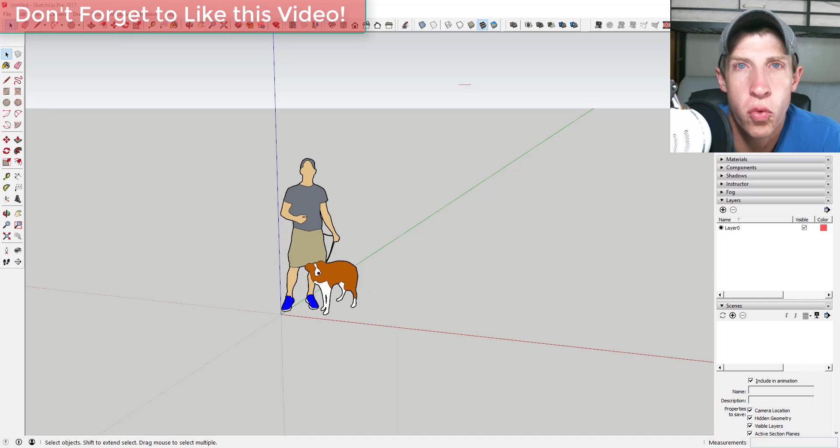In this video I'm going to model an old covered bridge, using a photo as a reference image in order to get the shape right. So let's go ahead and just jump into it.

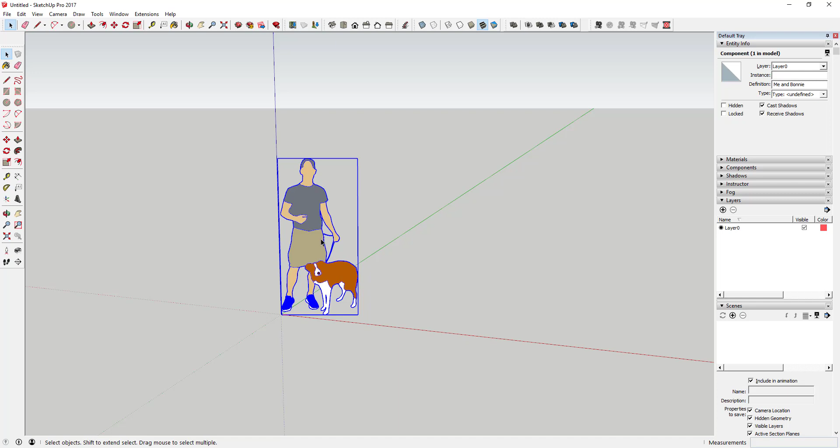The first thing we're going to do is import our reference image. This is just an image I downloaded off the internet. You can go ahead and delete out your default model, and then come up to Import.

Once you find your image, make sure the option for image is checked, then double click on it to bring it in. You can click once to set a base point, move your mouse, and then click again to import this.

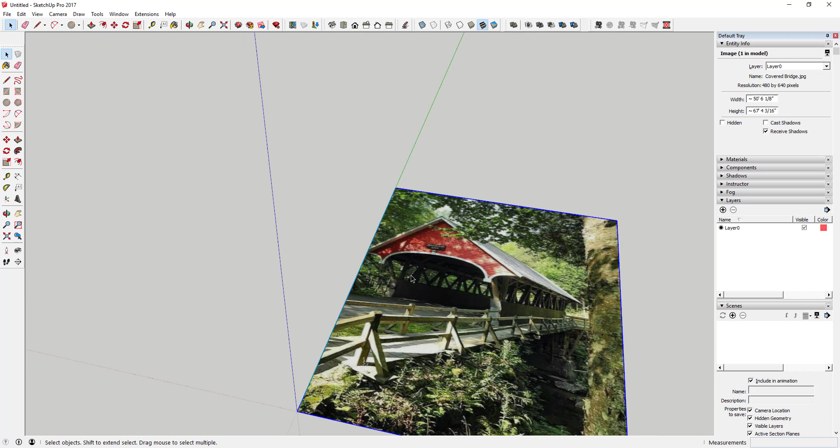The first thing we're going to do is stand this up. We'll activate the rotate tool by tapping the Q key, then lock it to the red axis by tapping the right arrow key. I'll click on that corner and rotate this up.

The next thing I'm going to do is come in here and model this image basically, or trace it, so that I get my shape right.

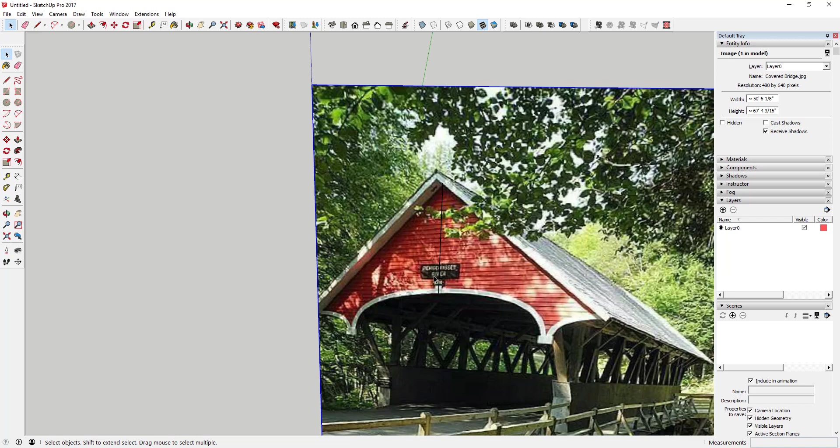All I'm going to do is find the center point of this and then flip it, so I'm going to model this just once.

So I'm just going to come in here and kind of model along this curve. It doesn't have to be perfect.

You may want to try to get pretty close so your curve looks right. You may actually want to use the curve tool or the arc tool to model this, so that your arcs follow the curve properly, so when you push pull it your curve isn't choppy.

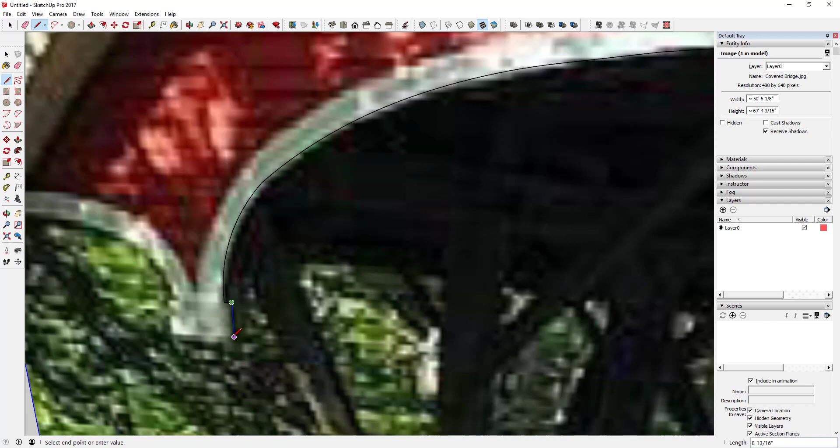So you can go ahead and come in here and just model this. And then once you fill this in, that's going to give you a face. You can see how I have the face in here.

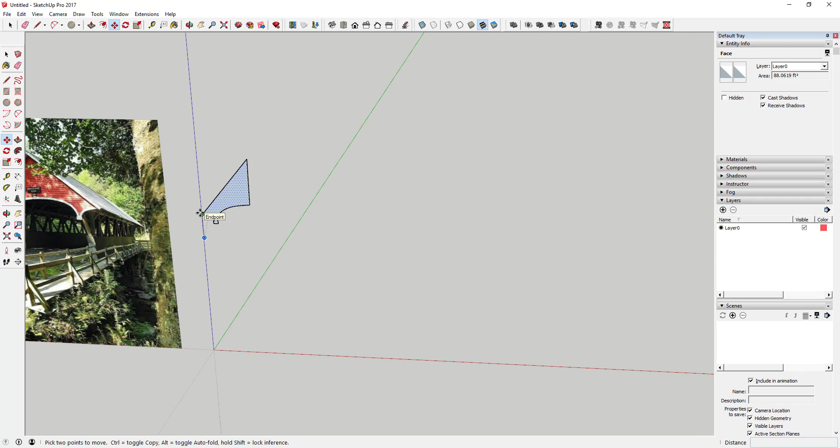Once you have the face, I'm going to move my image out of the way for right now. Then I'm going to move a copy of this out this way using the move tool. I tap the M key, select this, click on the corner, and tap the control key to create that copy.

Then you're just going to use the scale tool to flip it in place, and once you've done that, you can move this back. You can erase out that center line, and now you've got this symmetrical shape that matches up with what's in this image.

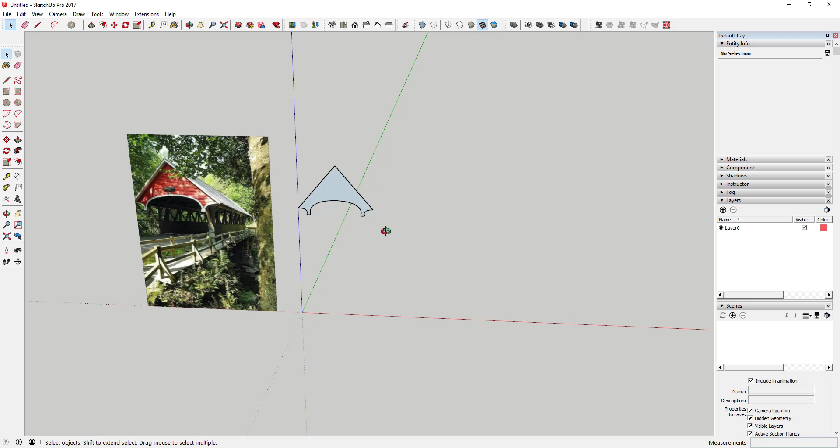The next thing I'm going to do, because if I look at this image, it looks like this is just kind of a cover on the front side. So it's not actually like that, the roof is kind of a separate piece.

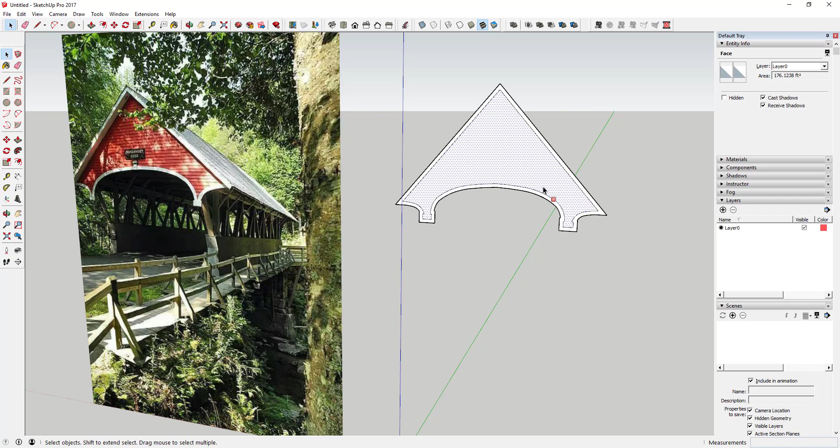So what I'm going to do is use the offset tool to offset this out so that I have my roof kind of hanging out. I activated the offset tool, clicked once and then clicked again to set my offset.

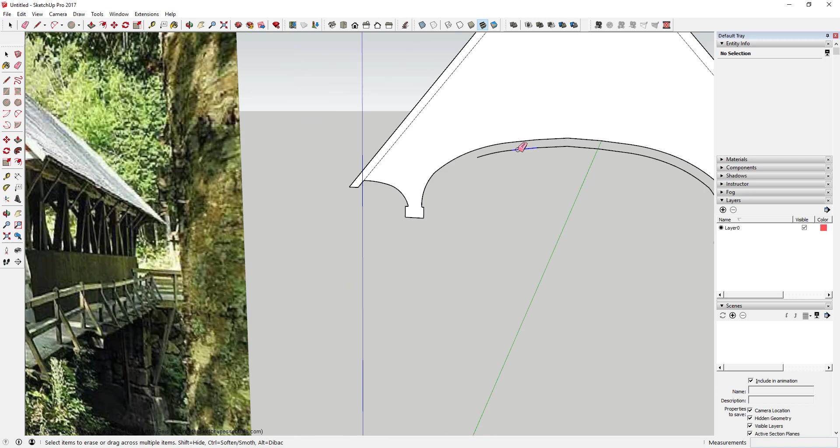Then I'm just going to use inferencing to extend these straight down or along the same angle, and then you can come in here and erase out the extra lines that this draws in, since you don't really need them, using the erase tool.

Once we do that, we're going to extrude our roof. You can see how our roof overhangs forward a little bit, so we're going to push pull this forward first, and then push pull it back the length that you want this to be.

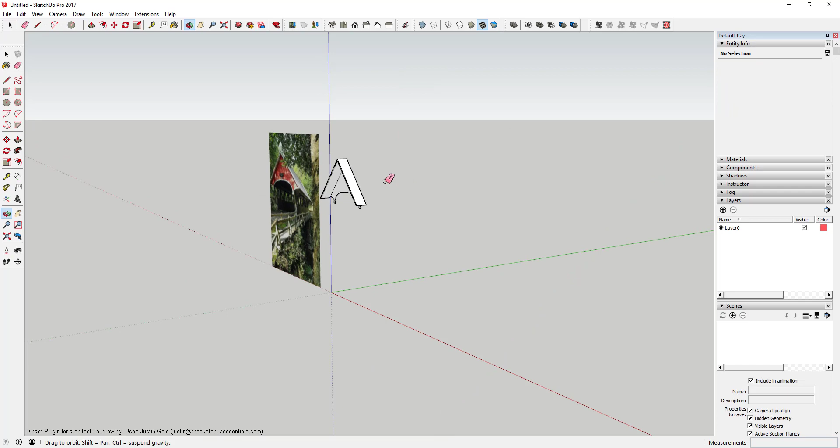One thing we may want to do is set our scale, because what I did originally is just trace on top of this. You can see if I click and move my mouse to the top of this, that's about 13 feet tall. That may not be too far off.

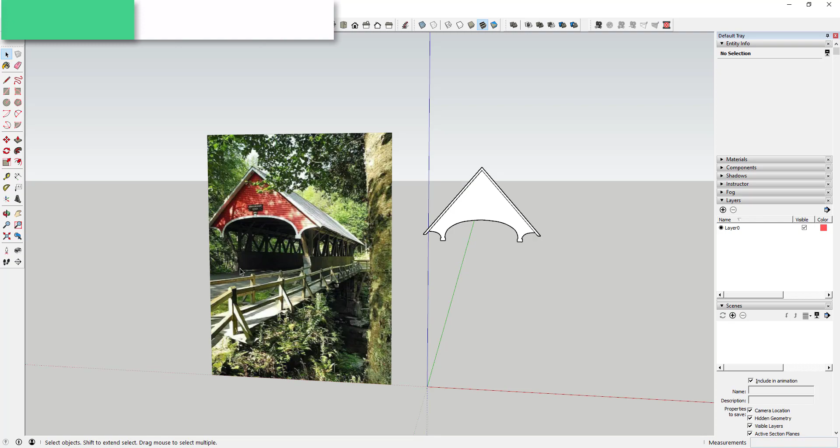But what we'll do is figure that this bridge is probably, we'll call it, 20 feet wide from this point to this point. So we'll come in here with our tape measure tool, click one point and then the other, type in 20 feet, and hit the enter key.

That's going to ask you if you want to resize your model, and you're going to go ahead and say yes. So that's just going to resize everything in here. Now if I click down to the bottom, you can see this is actually 20 feet.

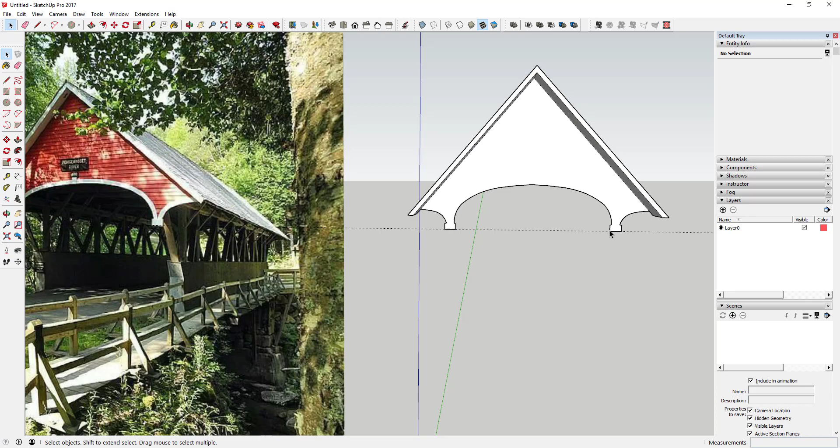Now, to get some scale, we can go ahead and push pull this the rest of the way to the other side. I'm going to assume this bridge is probably about 50 feet long, so I'm going to push pull that to about 50 feet.

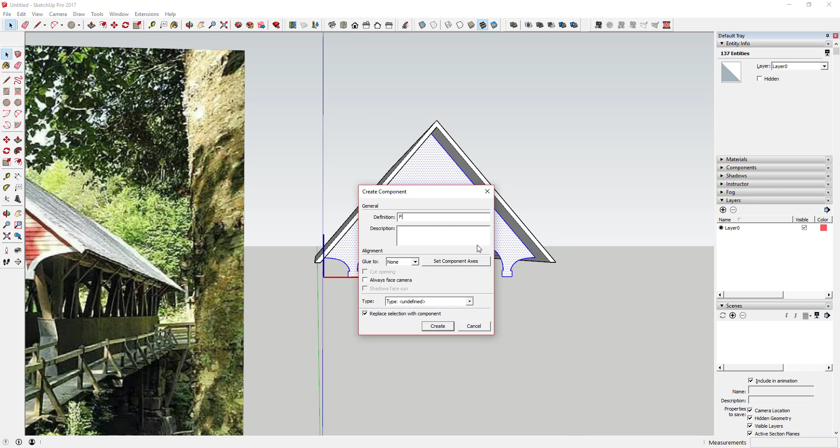I'm going to double click on this item, right click on it, and click make component, and I'm just going to call this bridge face. The reason I'm going to do that is because I'm going to make a copy of it using the move tool, and we can go ahead and measure and see how far back we had this.

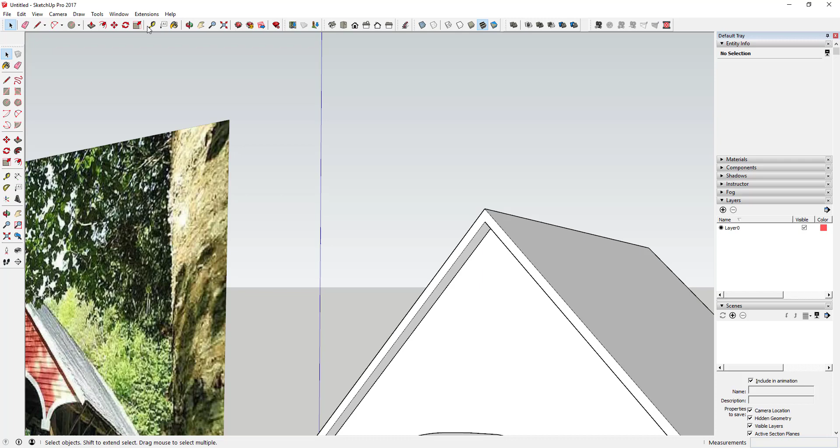You can kind of adjust this so that measurement looks a little bit better, a little easier. So that should have left me with a 1 foot 6 inch overhang on the front side here. So if I click from here to here, that gives me 1 foot 6 inches.

Now what we can do is make a copy of this and move it over here. I'm going to go ahead and flip this. The scale tool is not going to work this time, so I'm just going to use the flip along, and I'm going to say the component's green axis.

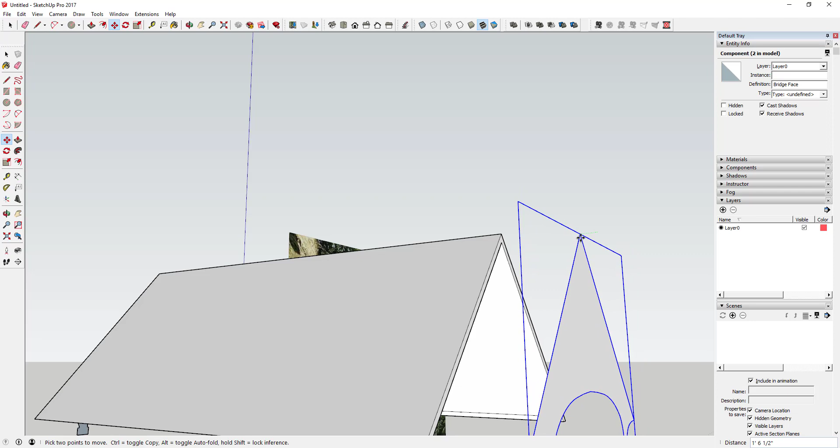Then I'm going to move this back so that it's level with this face, and then move it back another 1 foot 6 inches. So now this is kind of symmetrical on both sides.

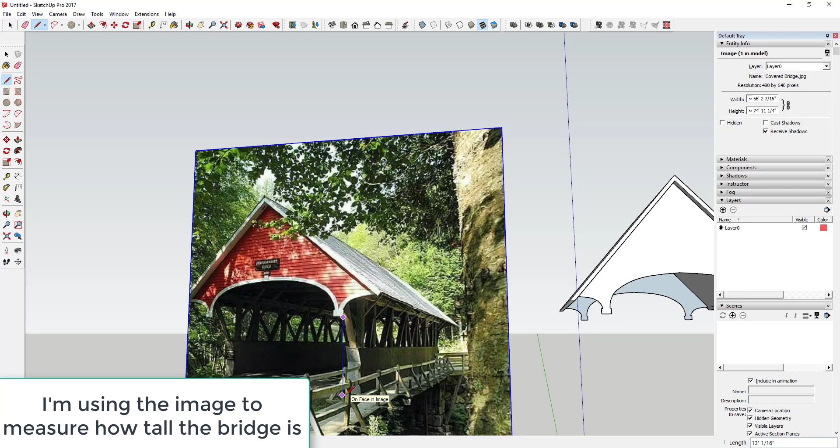What we can do is move our image back if we want, or just draw a line down to what looks like the base of this bridge. In this case, if I draw a line from this point down here, it's about 13 feet to the bottom of these.

So you can come in here and draw a line down that's about 13 feet, so you can kind of see where your ground plane would be. Again, we can just use our image in here to check our measurements.

This little side path over here looks like it's going to be about 9 feet out from this inside point. So I can draw another line down and out about 9 feet to give me the general width of what my road's going to look like. So I'm using that image to help me a little bit with my proportions.

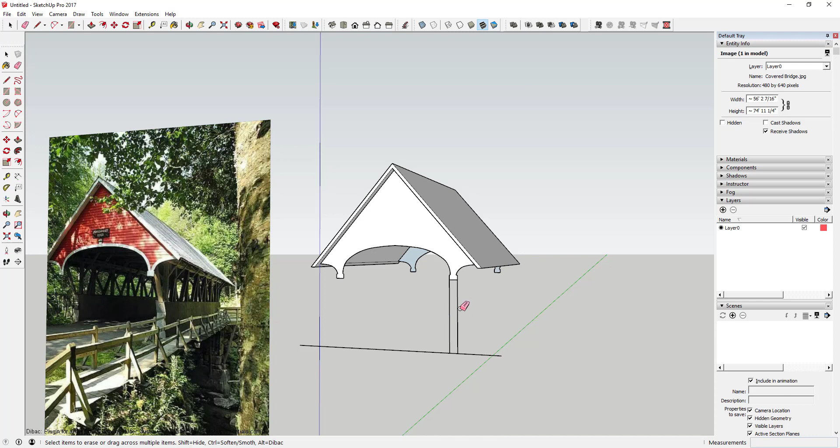Then we'll just kind of continue this road along for a ways. You don't have to be super specific with that for right now, but you can just model that in here, and then move it around and make it longer or shorter. Probably what I'm going to do is put that in a group so it doesn't merge with everything.

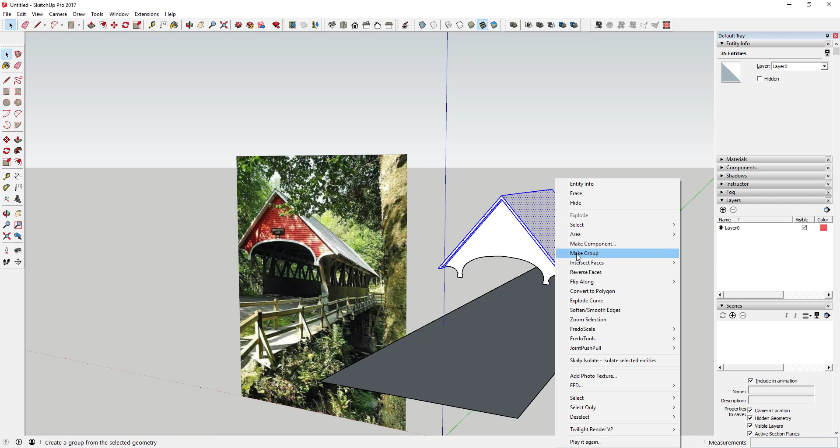I'm going to do the same thing with my roof. If you remember, this and this are both components, so I'm just going to triple click in here to select everything, right click, and say make group. Now if I hide that, my faces still show up.

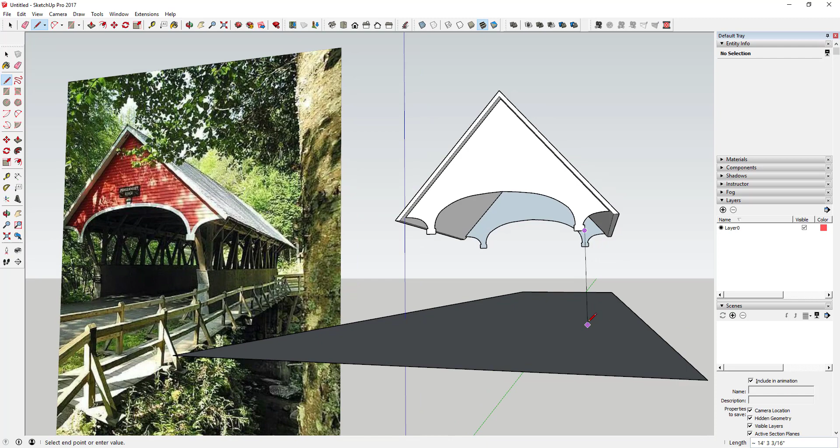So the next thing we're going to do is model our structure. In order to do that, I'm going to draw a guideline straight down, and a line to the back right about here. If you click on this line and look in the entity info, you can see that's about 48 feet long.

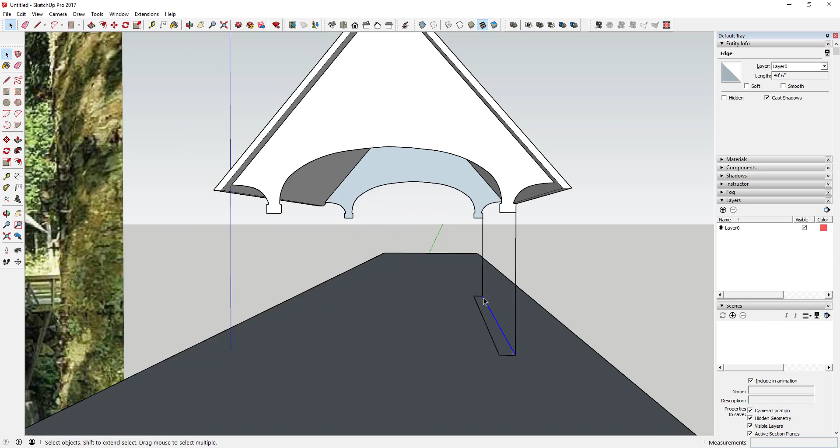So I'm going to start off and actually draw just the base of this wall. I'll use the rectangle tool to draw a rectangle over here, and I'm going to go ahead and make that a component, and we'll just call it sidewall. We're going to push pull that up a ways, and we're going to keep measuring things on this image to get our proportions right. In this case, I'm going to push pull this up about 7 feet.

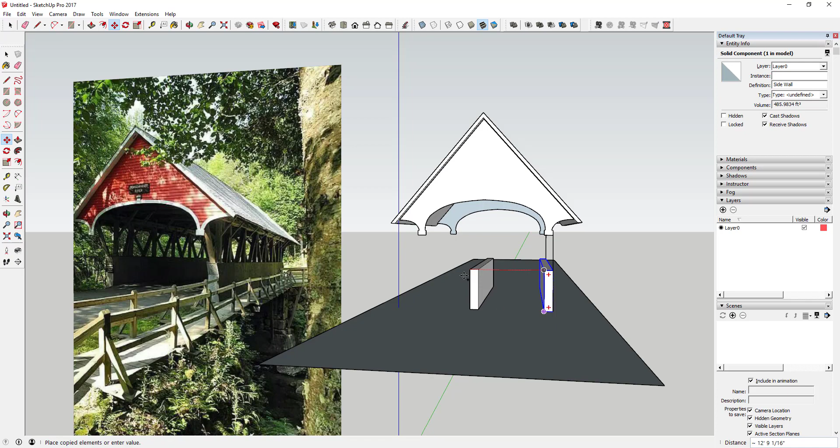I'm going to make a copy of that component over here. The reason I made this a component is so any changes I make to this one get made to the other one as well. That's how components work—when you have multiple instances and you change one, you can change both at the same time.

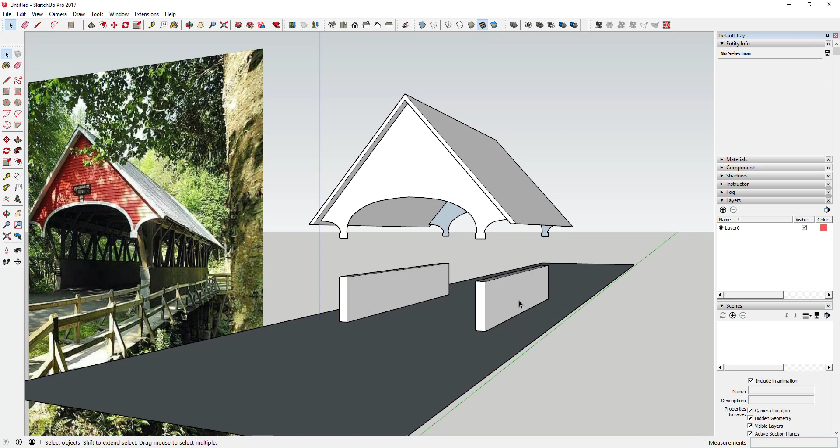Now we're going to model our structure. I'll draw a line down the center of this object as a guide. Taking a look, this gets divided up into 8 verticals, and it looks like these are offset a little bit too.

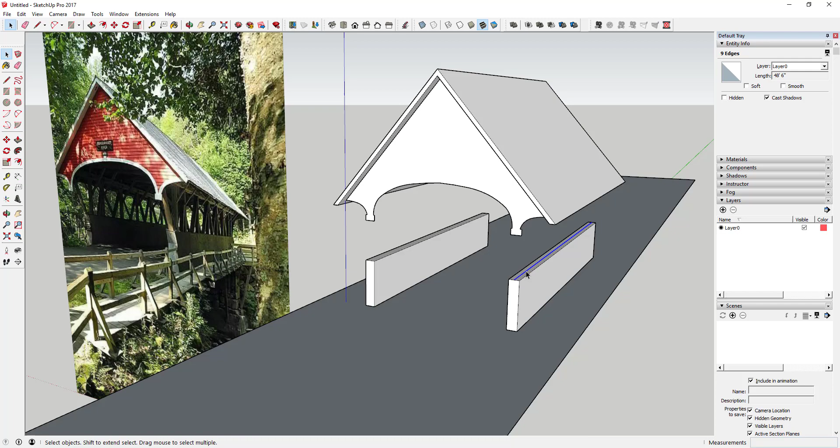So I'm going to divide this using the divide function, into 9 segments. The reason is because dividing this into 9 segments should give us 8 points in here.

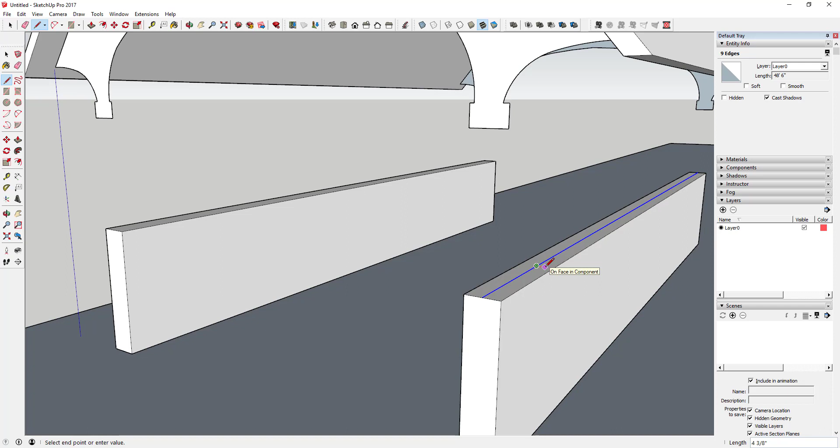For every point, remember this has a little bit of layback on the front side, so we're going to give it that layback, and then just model these structural pieces. These are probably pretty hefty, so I'm going to assume they're just 8 by 8 for the sake of what we're doing here.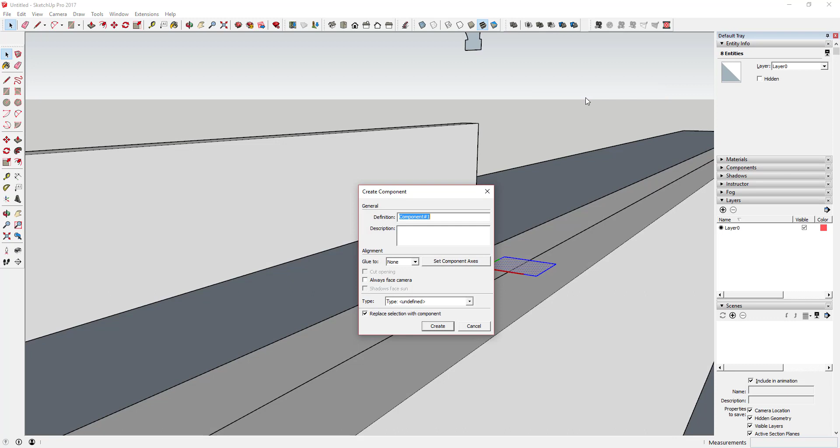I'm going to draw an 8 by 8 rectangle, select it, deselect the center point, and make that a component, which I'll call support post. You may want to cut that, go inside this object, and select paste in place so it's actually inside our object.

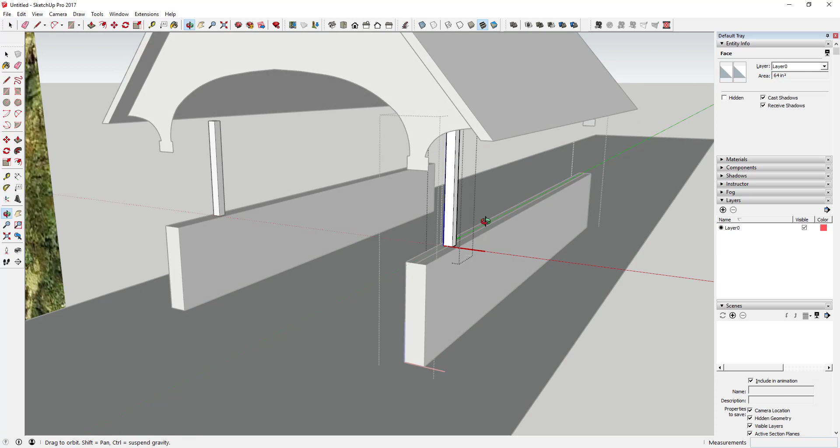Now when I add these, you can see how they'll show up on both sides. I'm going to extrude these up, and then, making sure I'm still in these objects, use the move tool to make copies of this to every one of these points.

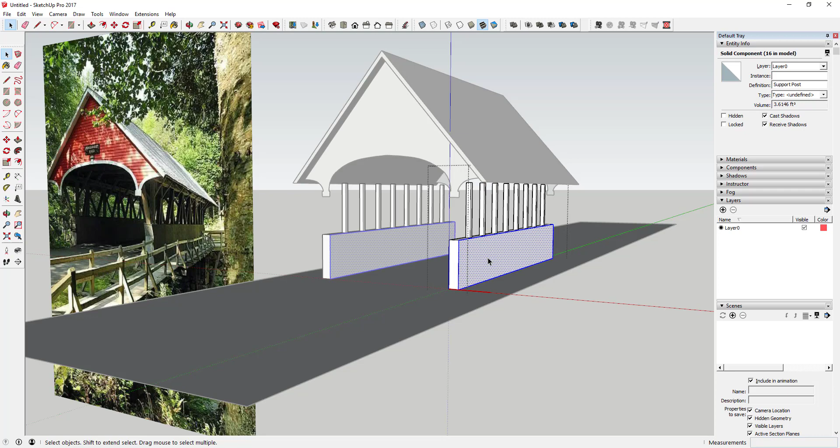If I move this, it'll lock to my point of my segment, and then all I have to do is type in times 8 or times 7 and hit enter, and that'll make 7 different copies of this object. So now I've got my individual objects, and I'll group these on the base so they don't merge with anything.

Then we're going to do the same thing up top, modeling our support posts. We'll figure this is probably about 12 inches high—actually, maybe a little more, so we'll add another 6 inches, making it 18 inches high. We'll make it 8 inches wide, a pretty broad support beam.

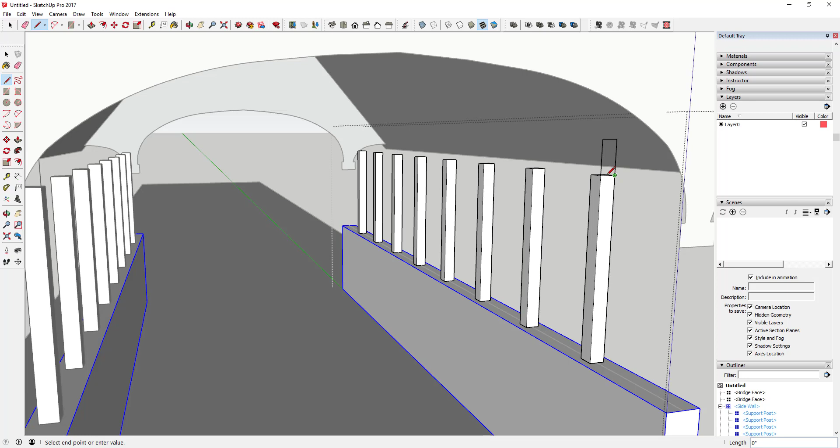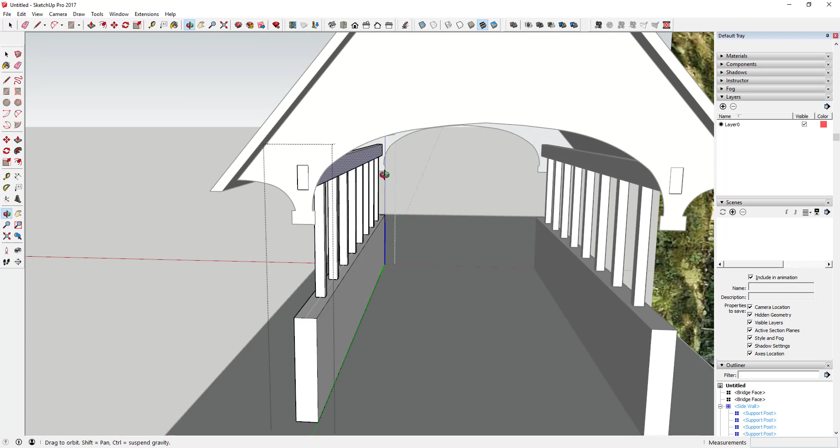We're going to push-pull this so it matches up with this object. You can see how it shows through this face—that's okay because we're going to extrude that face and give it some thickness in a little while anyway. So we'll push-pull that to both ends, and then group that as well. The reason we keep grouping those is so their geometry isn't merging.

Probably what we're going to want to do now is come in here and model some trusses. That's actually where we're going to wrap up today's video.